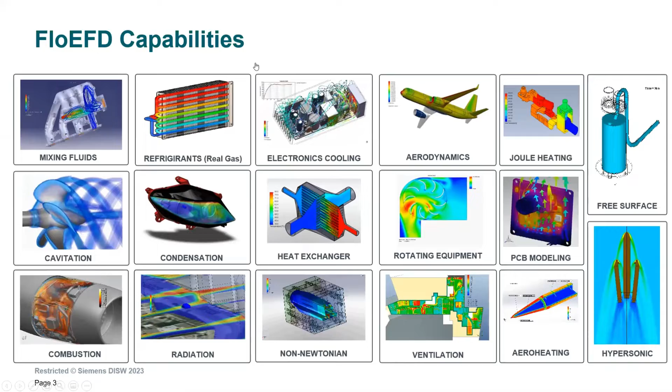Whenever you need to do board level analysis, chip level analysis, fans, heat pipes, guiding airflow—this is an area where we've had a lot of success and we've got a lot of functionality in FloEFD, and that's what I'm going to be talking about today.

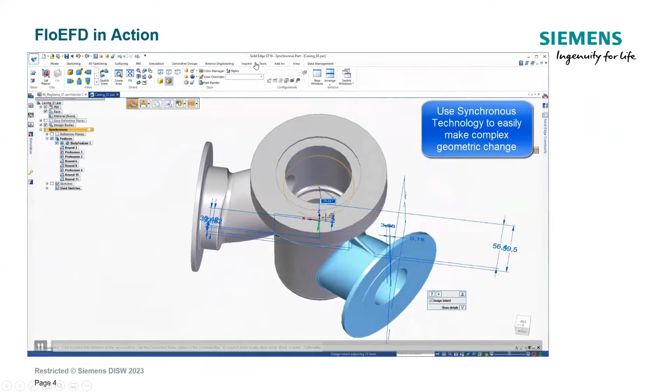So let's have a quick look at what FloEFD looks like in action. Here's a simple valve we can run a flow analysis on, looking at flow from inlet to outlet. The nice thing about being CAD embedded is you can make big changes to the geometry, like changing the angle of the outlet using synchronous modeling, and then just run the analysis again. To do that in a traditional tool, you'd have to go back to the CAD tool or the CAD department, have that change made, and rerun everything with a new step file.

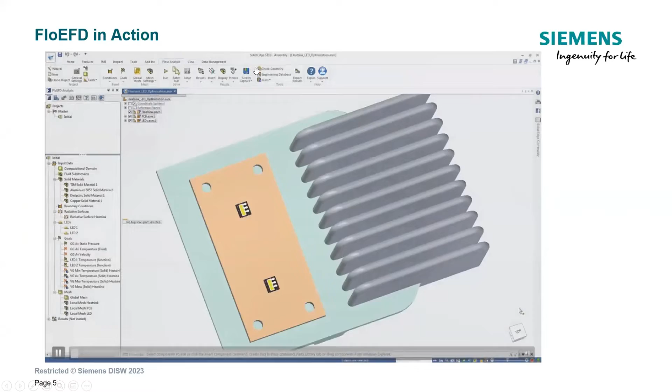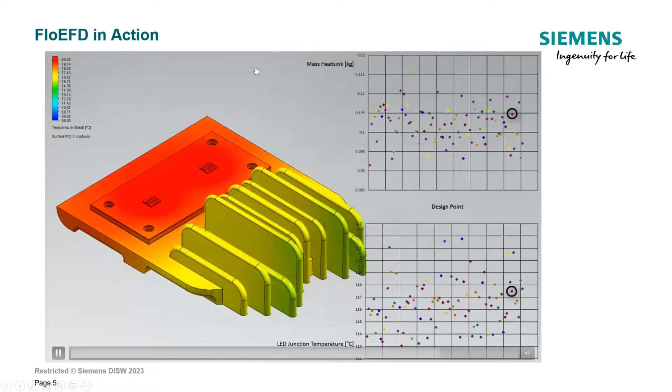Another example is looking at parametric variations. Here's an LED heatsink analysis. What if we had control of all the CAD parameters, so we could drive sketch dimensions and pattern dimensions, and really look for the most optimum combination of parameters—maybe a combination you hadn't even guessed—and let the software find the best one: the lowest temperature plus the lowest mass. We can really optimize on parameters which you can't do if you're just working with a step file or a Parasolid file. That's really the benefit of being CAD embedded.

Finally, FloEFD is part of the Simcenter 3D world, and it's accessible via value-based licensing or tokens. You buy a token pack from ATA and you have access to everything in the wheel. So let's say you start by buying tokens to access the structural analysis portion of Simcenter 3D, which is its core competency. That's great, but maybe six months down the line you have a request for additive manufacturing, motion, acoustic simulation, or thermal, which we're talking about today. You have access to everything in this wheel if you purchase tokens.

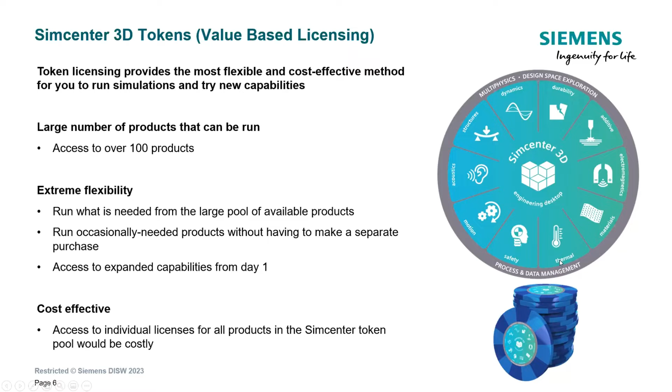It really future-proofs your investment and allows you to leverage all the capabilities of Simcenter 3D, which are getting added to with every major release. So watch this space. With that, I'm going to jump into a demonstration of FloEFD and show you what the software looks like, a bit of a look and feel of the tool.

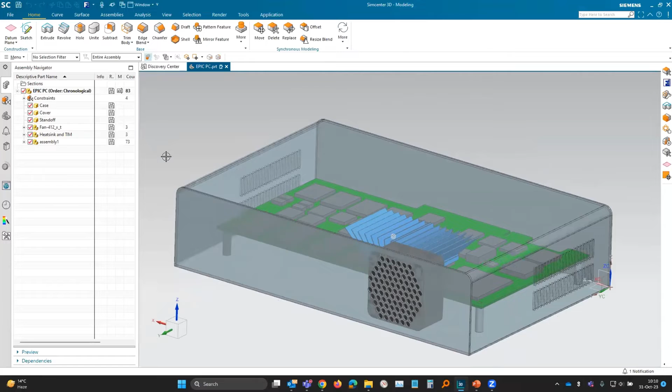So as you can see on my screen, I have an electronics box—this might be like a set-top box or a router or some other consumer electronics piece of equipment you might have in your house. You can see there's a folded sheet metal case and cover, and some electronics in there. If I hide these parts, we can see we have a fan driving airflow with an arrow showing the direction. We also have an extruded aluminum heatsink here, and a representation of the board with some blocks to represent the chips on this set-top box.

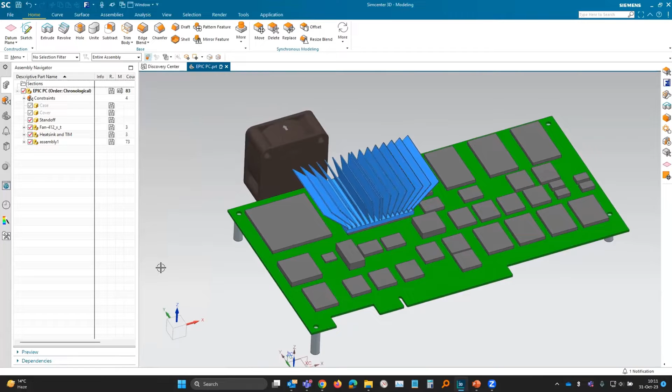We'd really like to understand what the maximum temperature of the electronics is going to be. Is my heatsink big enough? Is it too small? Do I need to adjust the fin parameters? Is my fan in the right location? Are my holes in the side of my casing sufficient, and are they in the right spot? You might just take a guess at some of these parameters based on tribal knowledge or past experience, but if you'd really like to understand if your combination of design parameters is fit for purpose, you need to do analysis. That's really where FloEFD comes in.

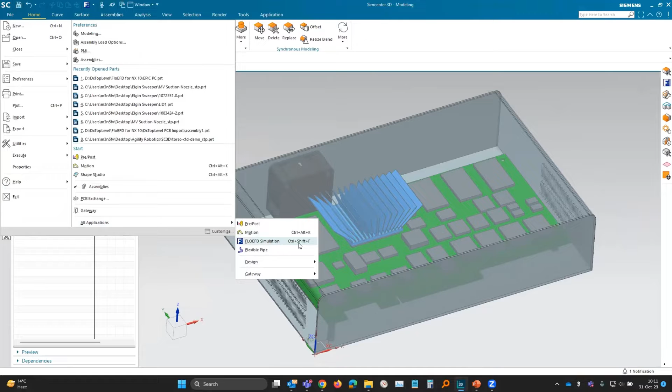So this is Simcenter 3D. We're currently in the modeling mode, so let's go into FlowEFD mode. Simcenter 3D has a variety of different modes based on what you're trying to perform, and FlowEFD simulation is one of the modes. If I switch into that, you'll see that at the top here, this changes to FlowEFD simulation.

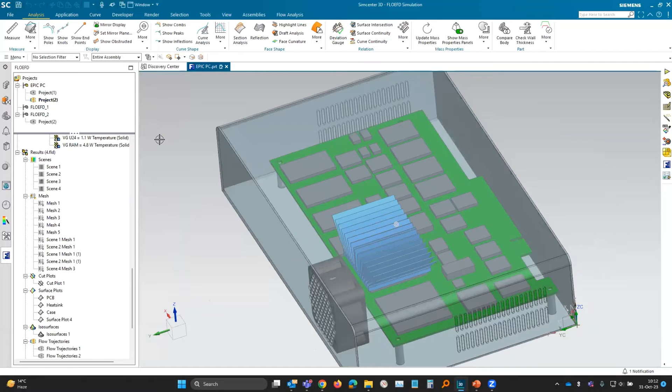Now, Simcenter 3D looks and feels very much like NX, and that's because it is a subset of NX—a stripped down version of NX which allows you to do CAD modeling, CAD manipulation, and importing of CAD data from competitive tools, and then it has all of the analysis capabilities bolted on top. So if you're an existing NX customer, this is a really great way to take advantage of the geometry you've built and perform analysis embedded within that NX environment.

So moving on to FlowEFD, you see that we have this flow analysis tab up here—it's one of the ribbon toolbar items, and it looks daunting.

There's a ton of buttons here, and we also have the FlowEFD tree combined with all the parts tree that we saw a second ago, where you can turn bits and parts on and off. You have all the constraints for your CAD assembly. If I was within a part, I would see all the part history here as well.

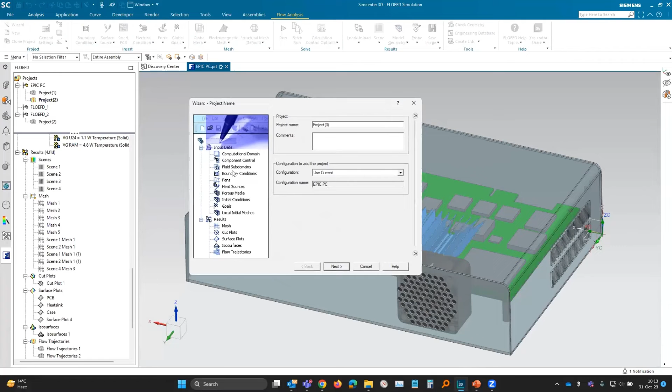But FlowEFD is also an extra icon here. What I'm going to do is just step through the wizard real quick and show you some of the features within this tool.

So you can choose a unit system. I'm going to be using an SI focused unit system, but I can also choose a US unit system as well to go to Imperial.

Now here, this is important. There are a few different analysis types we can switch on and off based on what we're looking to perform. Fluid flow and conduction, that's typically all we need to do. We also have a structural solver - if you need to do an FSI simulation, it can solve for static, frequency, buckling, and new non-linear capabilities in FlowEFD. We're actually taking the Nastran solver and porting it inside of FlowEFD for doing FSI. But I don't need that for now.

We also have EM - electromagnetic simulation, low frequency, so things like magnets, solenoids. We can have a look at electromagnetic fields and how that might affect things like traces on PCBs, or voltage or current that's induced in conductors due to magnetic fields. We can absolutely do that.

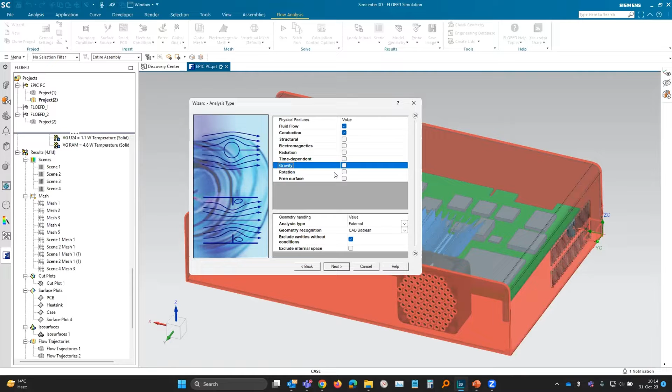Radiation, time dependent is your transients. Gravity, I'm actually going to turn that on. If there is natural convection, we need to set a gravitational direction denoted by this arrow. We also have rotation for pumps, fans, compressors, turbines. Free surface for when you have a gas and liquid interface, such as the surface of the sea - we can look at sloshing effects and droplet formation.

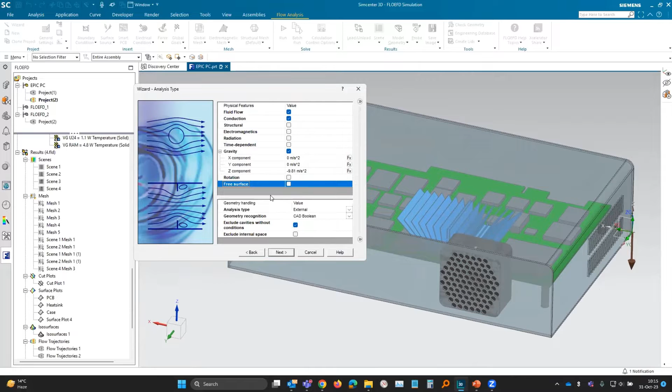So as you can see, there is a lot of capability in here, and quite a lot of overlap with our flagship CFD product, Star CCM Plus as well.

Moving on, I'm going to choose air as my working fluid - no, it's not under liquids, it's under gases. As you can see, we have a wide variety of fluids predefined in the database, even going as far as steam, so we can have a look at steam to water condensation. We can also look at phase change - we have phase change refrigerants in our library as well. And with air, we can actually look at humidity effects also.

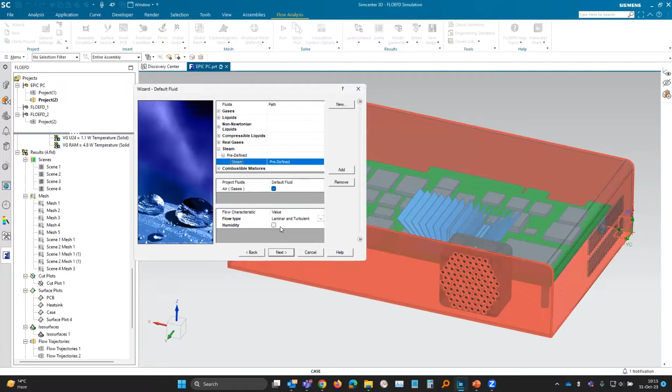Default solid - I'm just going to choose steel. Let's come down here to mild steel. Okay, so that's basically setting the standard material.

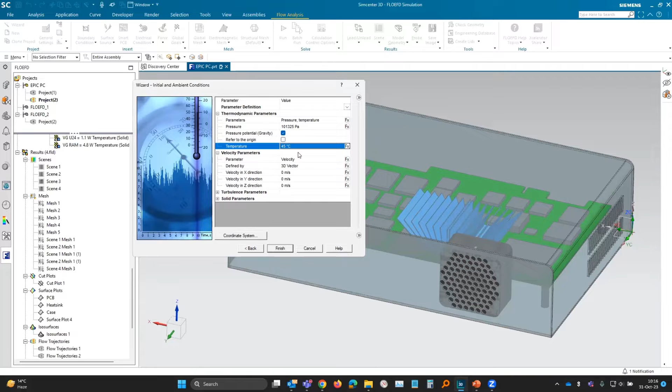I'm not going to worry about roughness. Here's my ambient conditions - let's say this set-top box is operating in the Arizona summer, let's say it's going to be 45 degrees C, or about 120 Fahrenheit. Worst case scenario. So I'm just going to click finish.

And what we're going to get around the geometry is a computational domain. You can see we're getting a volume around the electronics enclosure where our air is going to be modeled, where our heat transfer is going to be modeled.

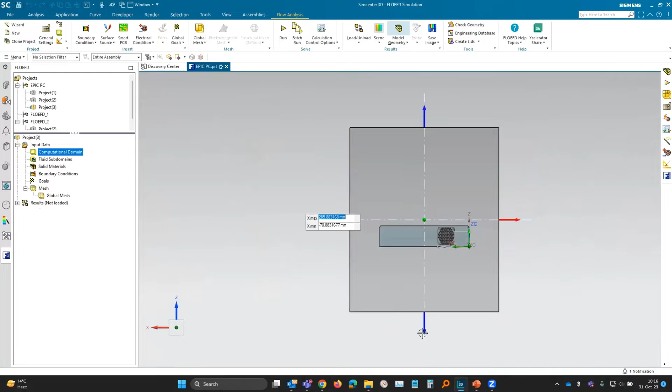It's a little bit big right now, so I'm just going to go normal to the screen, and I can just grab my edges of my domain and pull those in a little bit because I want to reduce the analysis scope. And again in this direction as well. Simple as that - I just click, and now we have our new computational domain specified around my electronics enclosure. No need to create a separate part to represent the air volume around my electronics, just resize the domain.

Now, as I mentioned, FloEFD has a lot of additional capabilities around electronics cooling. We have things like two resistor and network assembly models, thermal joints, thermal resistances, thermoelectric coolers, heat pipes, printed circuit boards, LEDs. We have electrical conditions, so voltage and current sources that we can define on conductors. We have electrical elements and IGBTs for high power electronics. We also have things like smart PCBs.

So these used to be modular, but now with the tokens in Simcenter 3D, you'll get everything that you can see on my screen as part of the token system in Simcenter 3D. Again, a great way to future-proof this particular tool.

One thing I did want to touch on is the EDA import capability of FloEFD. So at the moment, I do have an assembly representing my PCB, but if you want a little bit more detail, we can actually pull in a much more detailed representation of the PCB using the ODB++ ECAD file format.

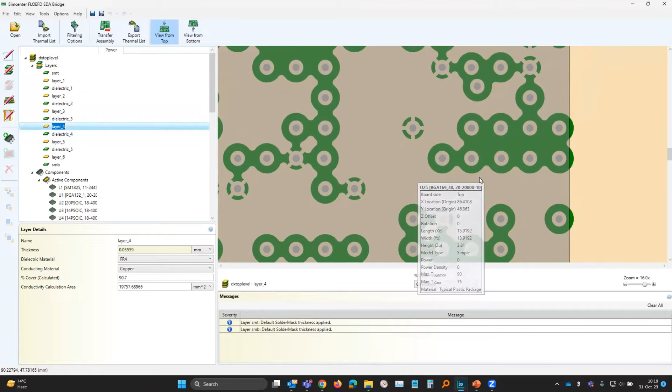And then the logic is performed on the chip, and then it will control something else on the board. So although these are primarily here for electrical connections, they're also very important thermal paths as well. You can control things like the diameter of these vias, the plating thickness of these vias. Some vias are also filled with solder to increase the thermal conductivity under high power components.

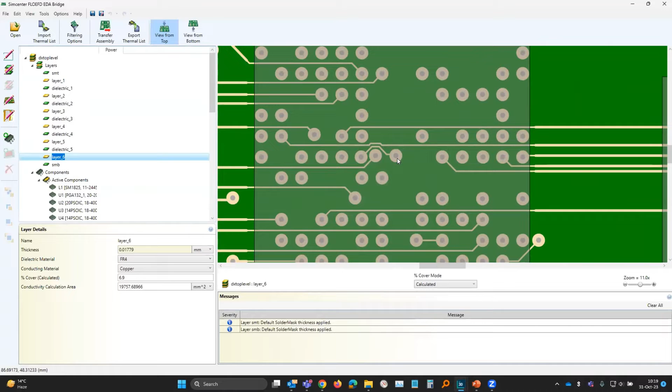So if you just use a block representation of the chips and the board, you're missing a lot of the crucial heat transfer paths that the ECAD team have so lovingly created. They created these thermal paths on purpose, and if we're not modeling that, we're doing them a disservice. So the EDA bridge allows us to pull that data through and use a smart PCB representation of the board.

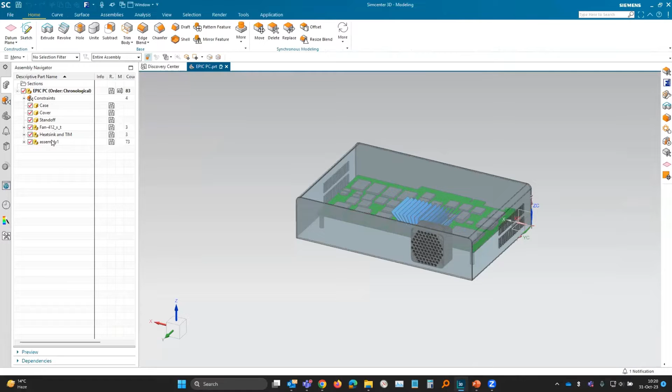I'm not going to actually click transfer because it takes two or three minutes, but I do have that already built over here, and I'd like to quickly show you what that looks like. Let me just go open in window. So I do have a sub-project defined here, and I do have this smart PCB.

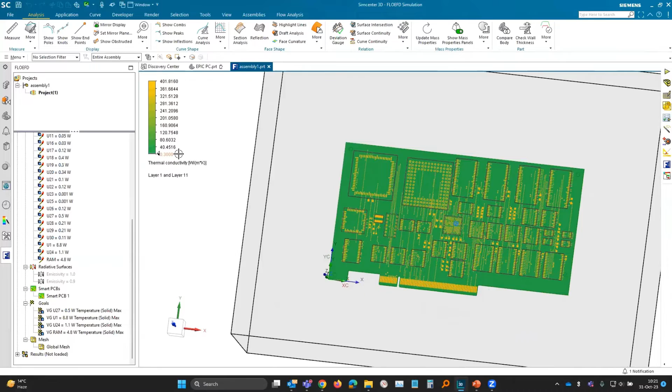As you can see, if we look at this legend, it ranges—I'm plotting by thermal conductivity, watts per meter Kelvin, between 0.3 and about 400. So 0.3 is your dielectric FR4, and then 400 is the copper. And this is really what the smart PCB is doing—it's pulling through that data.

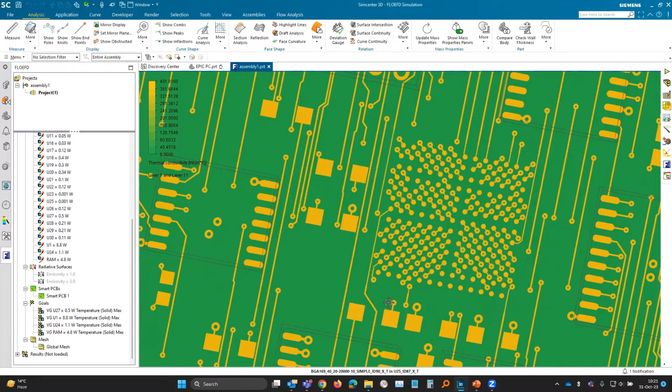Now if I zoom right in, it does get pixelated. All analysis has to discretize at some point, so there is some pixelation there. But at a high level, you can see the absolute amount of detail that's created in this smart PCB across all the layers and all the heat transfer paths through the board.

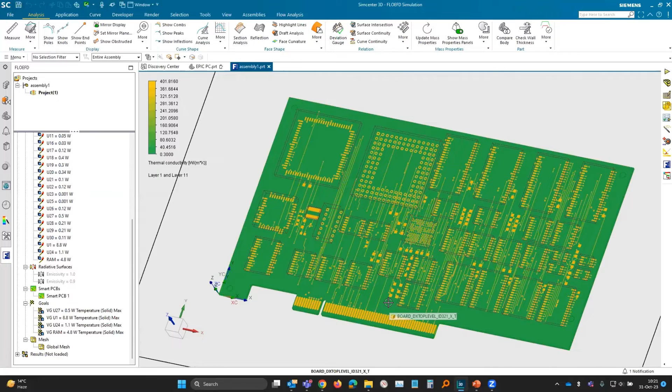Rather than modeling the copper explicitly, what FLOEFD is doing is creating a conductivity matrix based on pixels within the board. As you saw when I zoomed in, each one of these pixels has a conductivity to it, and it's linked to the neighboring node using a thermal resistance. So it's basically one big matrix of thermal resistances.

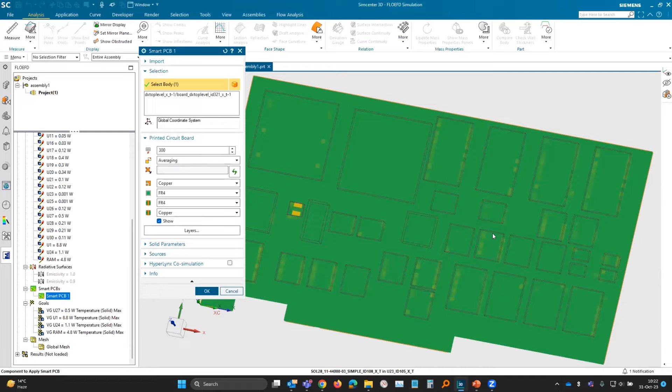Now this is a very, very detailed board. It is computationally expensive to model a board at this sort of fidelity. So rather than using the fine level of modeling, I can move to an averaging method, and what that does is it creates a pixelated representation of the actual geometry. It's just calculating this new pixelation now, but as you can see, we don't have as fine or as granular a density of pixels as we saw a moment ago.

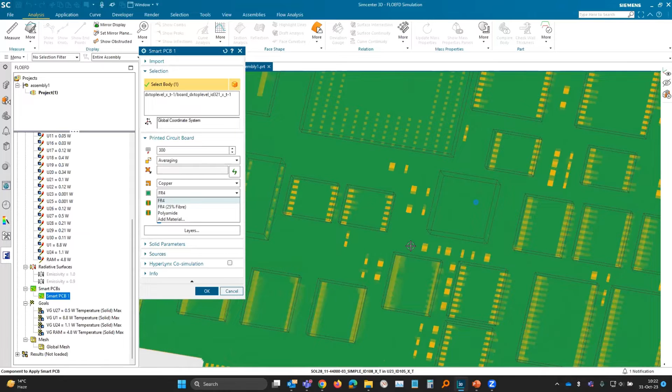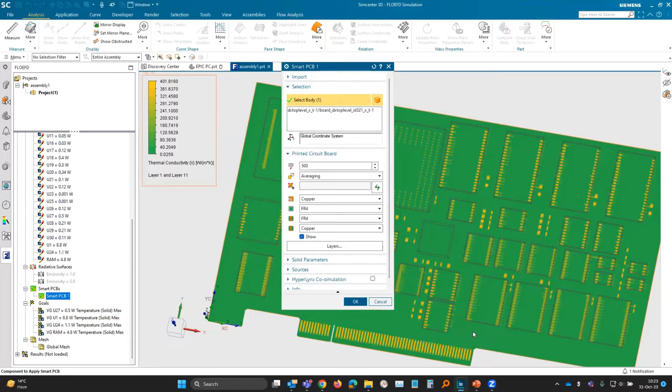Although it's not the absolute geometry for a thermal analysis and the conduction paths through the board, this is actually good enough, and you as the user can control the level of fidelity using this. You can see here, if I hover over it, number of tiles per layer's longest side. So if I make that a little bit higher, for example, and click off the box, it's going to calculate the new pixel density and show me what the new conduction paths look like based on that density.

Okay, so I'm not going to do this—I'm actually going to go back to my fine level modeling for now. It looks better for demo purposes, but I just wanted to show you that we have different levels of fidelity for modeling PCBs.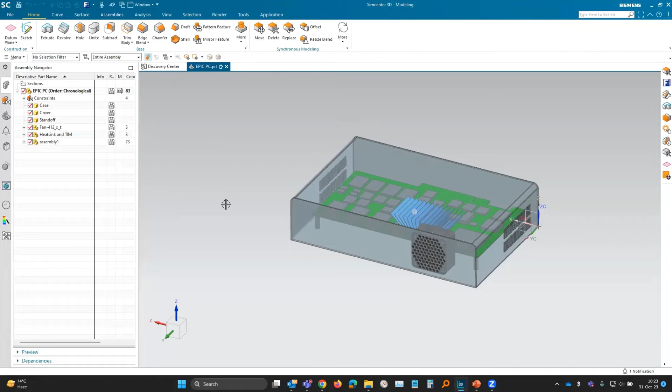Let's come back to the top level assembly and go back into FLOEFD mode, and go to my flow analysis. Other things we can do—so the PCB is taken care of, we have the board. I skipped over assigning powers onto the chips, but I'll show you that in just a moment. But other parameters—let's say we wanted to add a material to the heatsink.

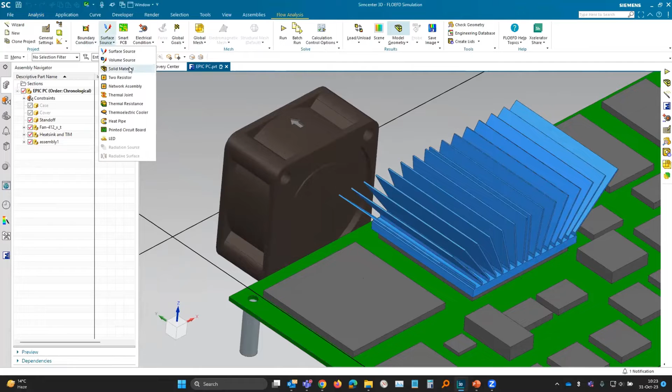I can just come to insert solid material. At the moment, remember everything's steel. I can click on my heatsink on the screen, predefined, alloys, aluminum 6061. Tick OK, simple as that.

Let's hide this guy. We also have a TIM under here, right? So if we do want to create a custom material, we can absolutely do that. Click on solid material, click the TIM, click the create edit button, and let's go to materials, solids, user defined. Let's just call this TIM, thermal interface material.

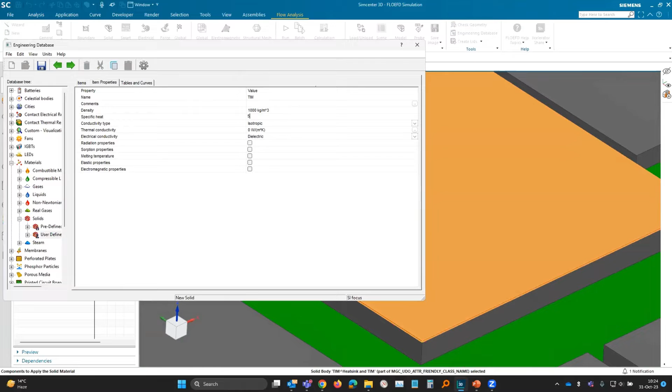I do need to give a density and a specific heat. You can grab from the datasheet, but the most important thing here is the thermal conductivity. Let's say this is going to be 2 watts per meter Kelvin for this thermal pad. I can save it, I can now select it, and now we have the thermal interface material assigned on that part.

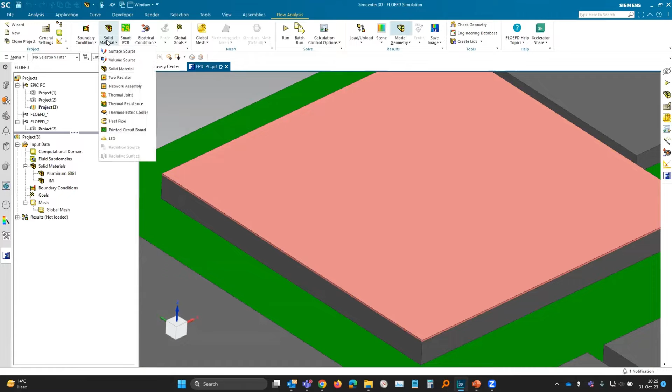Okay, if you wanted to, we could also assign a thermal resistance. Rather than modeling the TIM as a solid part, we could have a thermal resistance between the two parts. So I could give a material and then define just the thermal resistance, and that will define my thermal resistance between the TIM and the heatsink.

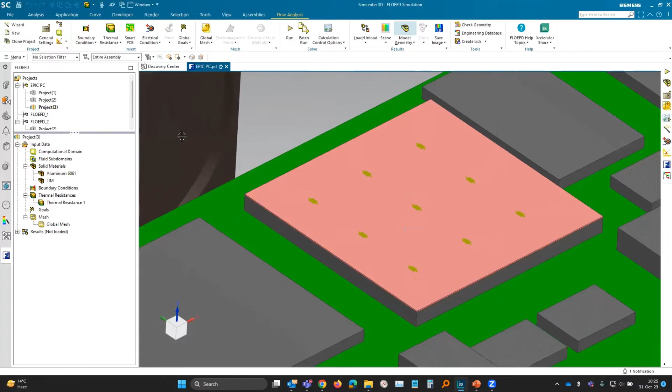Other things we can do, let's look at this fan. So if I come over to my, where are you? There it is, here's my fan. I can build into my fan. This is going to be an internal fan.

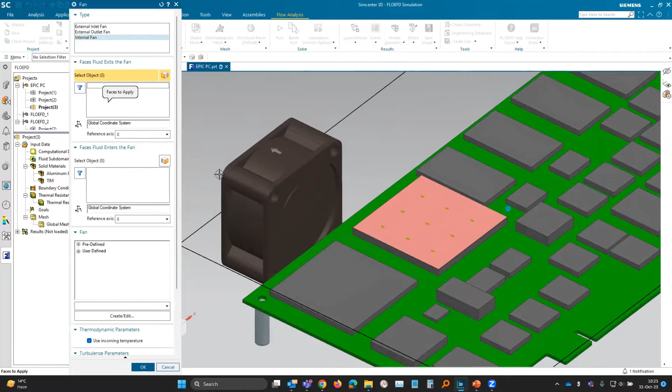So I need to select the face where the fluid exits the fan. So that's going to be this side over here. And you'll notice that I've removed the blades of the fan and I've got just a planar surface that I can click on, right? That's just a little bit of geometry preparation you need to do because spinning the blades, yes, it's possible, but it's also very computationally expensive.

So if we can take some shortcuts somewhere, we will. So I've just kind of removed the fan, removed the blades, and just put in a planar surface here where the flow will be sucked in from, and then ultimately blown out the other side. And then we need to link those two sides of the fan together with a fan curve, which we can just pick from some manufacturer datasheets that we have built into the software.

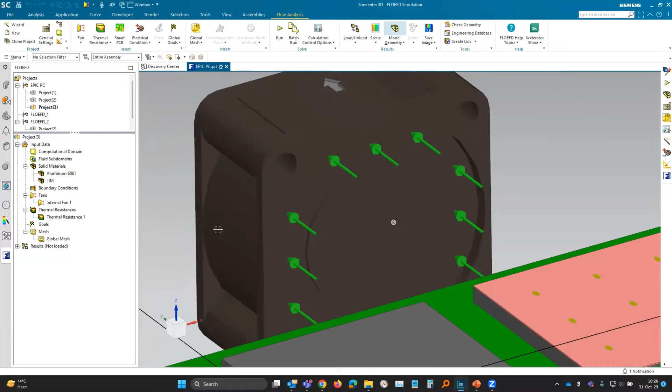Okay, and now you can see we have the fan blowing through the model like this. All right, let's just bring back my heatsink and my case and my cover.

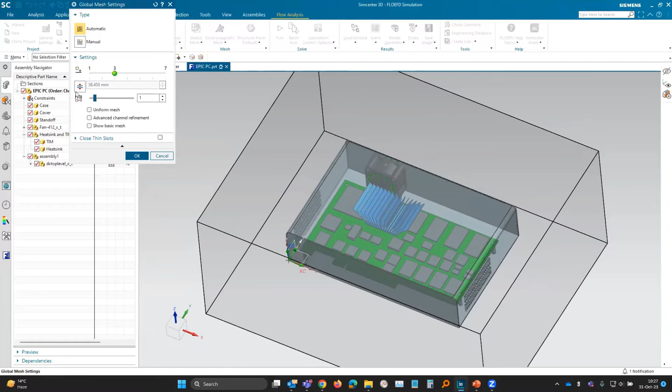Okay, so we're almost there. Let's say we've done all the pre-processing on this. We now need to define the computational mesh on my model. So moving from left to right in my toolbar, I can come over to my global mesh. We have two options, automatic or manual. So if I just click my basic mesh, it looks kind of coarse.

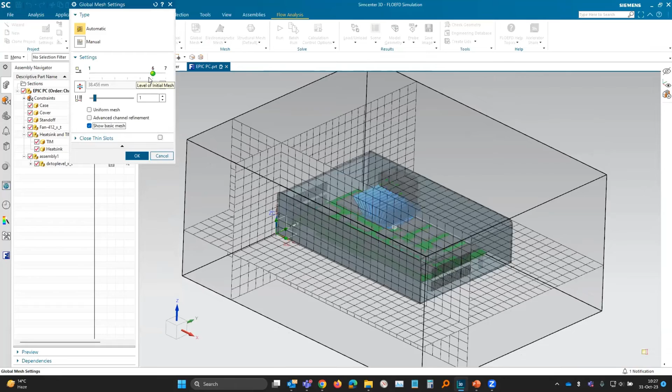Now, FLOEFD does use a Cartesian meshing schema, right? We don't have TET, hex, polyhedral cells, it's purely Cartesian in nature. Coming back to the way we democratize CFD for CAD designers, you don't want to be a meshing expert, you don't want to worry about boundary layer meshing. You just want to get an accurate result quickly without sending it to the CFD team. So with that in mind, we have just a Cartesian meshing schema, and it's what's called an immersed boundary mesh.

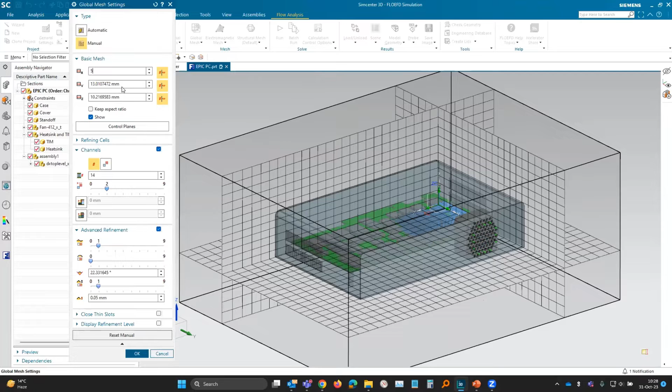I'll talk about that in just a second when we look at the results. But we can manually define things like the mesh size, the overall mesh size. If I want to make this finer in the X, Y, and Z direction, I can absolutely do that. So I can set my base mesh size. That's maybe a little bit too fine because we're going to be breaking the mesh down further from here.

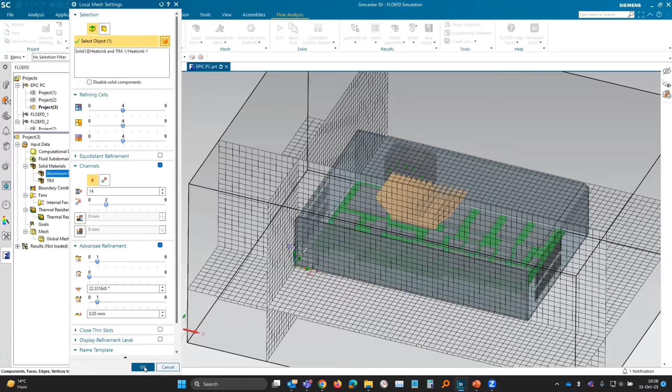And then we can do things like control the channels. There's some advanced refinement here, which is all part of the advanced training course. But we can also add in what's called a local mesh. So let's say you want more mesh on a specific part, let's say the heatsink, then we can add additional mesh by moving these sliders on specific parts inside the model, and that will ensure that critical parts have sufficient mesh resolution.

Okay, what I'd like to do is just kind of jump over to a model I've already solved and show you what the final mesh, the final generated mesh looks like. In fact, let me just take a slice through the model.

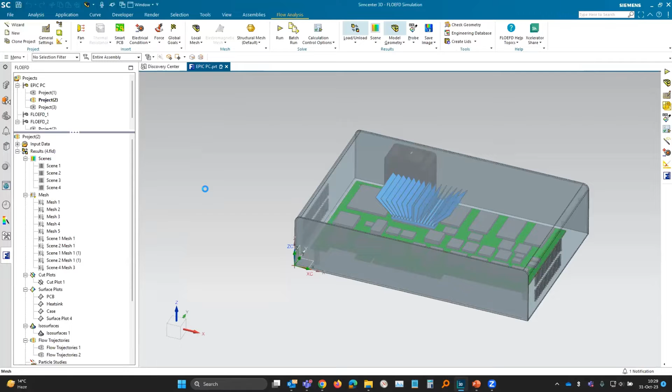In this way, let's just preview that, and I'm going to pull that through my heatsink like this. Okay, and let's hide all the geometry. So this is what the final mesh in FLOEFD looks like.

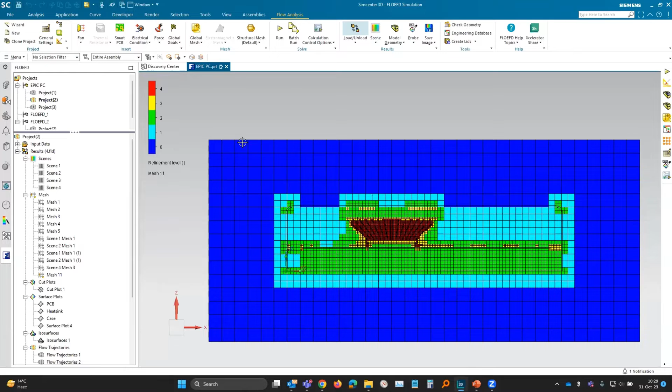So we've set the base mesh size, which is 10 millimeters, so 1 centimeter. These dark blue cells are 1 centimeter or 10 millimeter grid cells.

Now if I zoom into this corner here, the way we split cells and add refinement is what's called octree meshing. We take this cube and split it into 8 in 3D, or 4 in 2D. So now these cells are 5 by 5. We split into 8 again, and these are now 2.5 by 2.5, and so on.

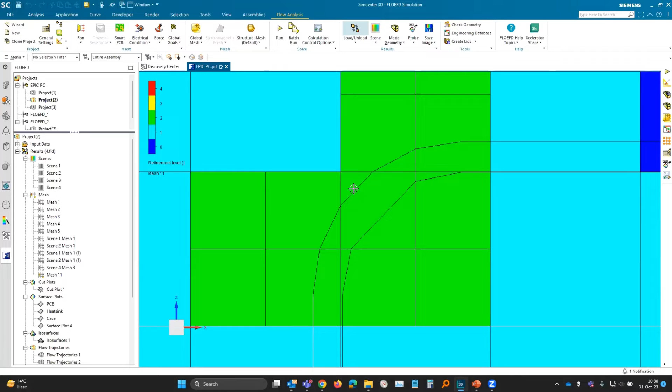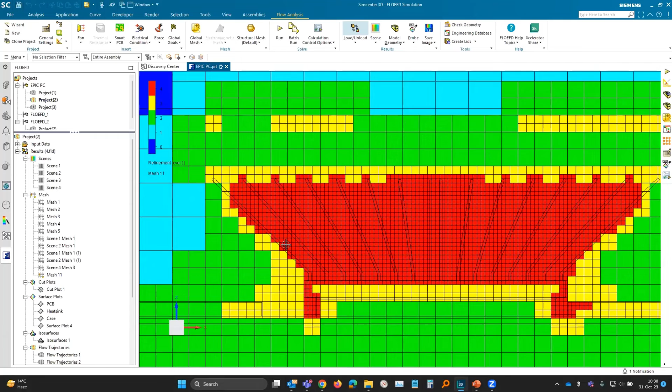You can see what was originally a nice smooth filleted curve we designed in NX has turned into a series of facets based on where the geometry crosses the boundary of the mesh, as you can see here — a series of flats. So if you need better resolution, it's just a case of forcing the software to split the cells further, which you have full control over.

All right, so around my heatsink I've got much finer grid cells, 3 to 4 grid cells between the fins. Another interesting thing is how we can have fluid, solid, and fluid regions within a single cell. You're not restricted to just solid and fluid cells — you can actually have multiple control volumes within a single grid cell.

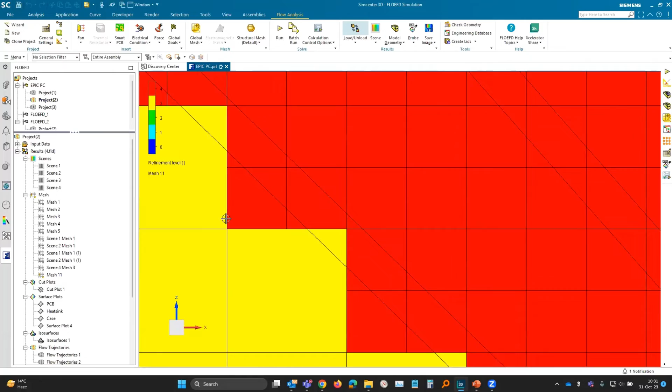And this is part of the secret sauce in FLOEFD. It's called the immersed boundary method, where we apply a wall function, the boundary layer wall function, on this planar surface between the fluid and the solid. I don't want to get into that too much, but I just wanted to highlight that this is a very different approach to CFD than most other tools take.

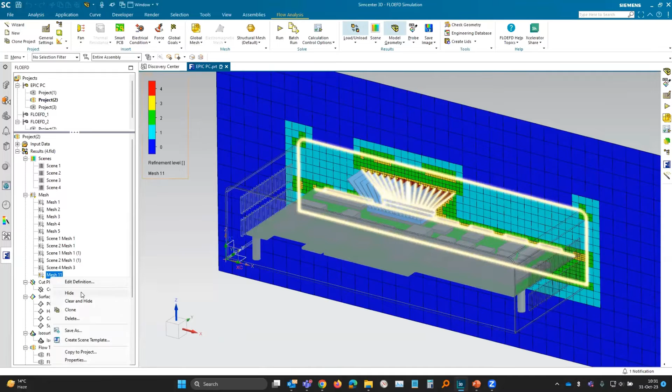And really the benefit is you don't have to be a meshing expert. You don't have to worry about boundary layer meshing — the software takes care of it for you, so you can get on with the business of actually designing your products. Okay, just a quick word on solving before we move on to results.

You do have to run the mesher. It is a finite volume mesher, and it is multi-core by default. My laptop's only got 12 cores, so I can select 12 cores. If you have a Threadripper machine with 128 cores, you can use 128 cores. We don't limit you by solver packs or anything like that — if you have FLOEFD, you have full core solving capabilities.

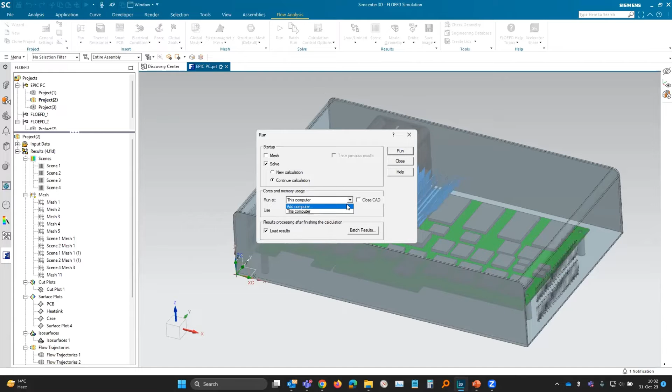You also have the ability to send jobs to a computer on the network. You're not limited to just a node-locked solve — we absolutely support floating solves and standalone solves, so it frees up your local machine for day-to-day work. And that's all with the standard tokens, completely accessible. This particular model took approximately 1 hour to solve, something along those lines.

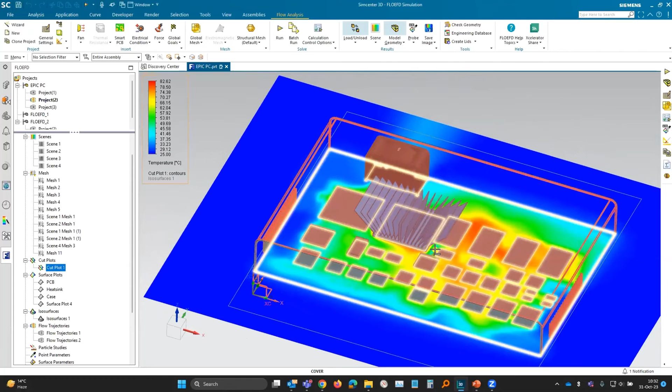And then we can start to have a look at some of the results. So I'm just taking a 2D slice through the model here, looking at temperature. As I move this slice through the model, I can probe the temperatures. My ambient is 25, not 45 as I said, but we can move my mouse around and see what sort of temperatures the airflow is getting to — the air temperatures within the box.

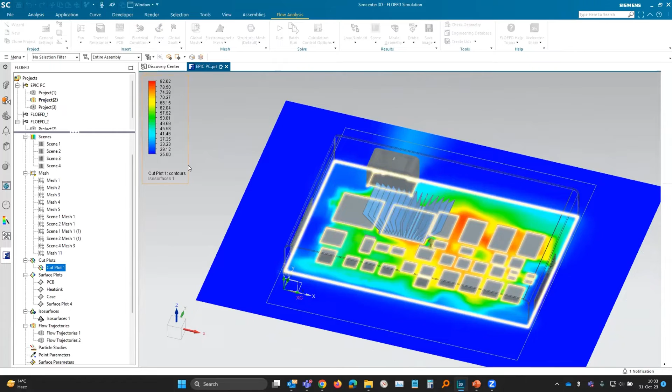If I don't want just temperature, I can switch over to velocity. So I can see the outlet of my fan, and some jets being formed at about 2 meters per second. Let me just pull this down, pull this up a little bit — I can see some jets being formed between the vent holes, as you can see here.

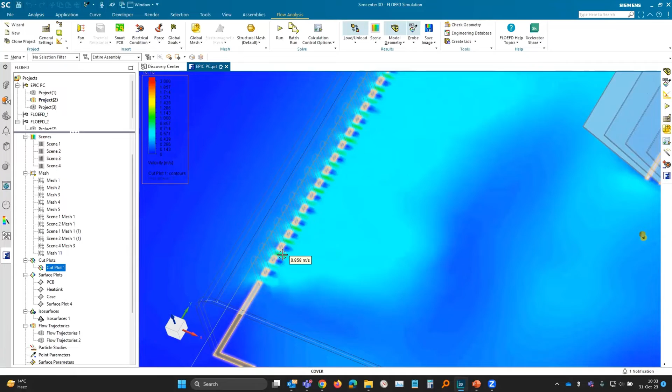So I can kind of interrogate the model using these cross sections, looking at a variety of different parameters. Velocity and temperature are probably the most interesting in this case, but we could also look at pressure real quick. So there is a very slight pressure difference from the inside to the outside of the box, because this fan is pulling a vacuum, and there's a resistance as the airflow crosses those vent holes.

One thing you do need to be a little bit careful about is if you have a lower pressure inside your electronics box, that's going to be sucking in a ton of dust. This could get very dusty without filtering. So we might want to flip that fan around and actually blow air into this model and pressurize it.

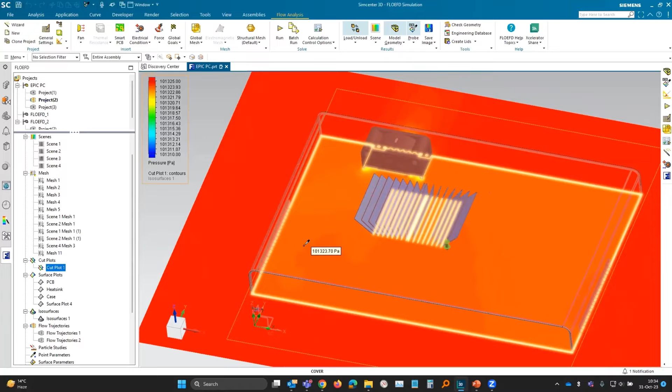So again, things we can look at in the analysis stage before we've committed to tooling.

Let me just jump back to temperature. So you can see we can take these cut plots, moving them up and down through the model. It's not too exciting.

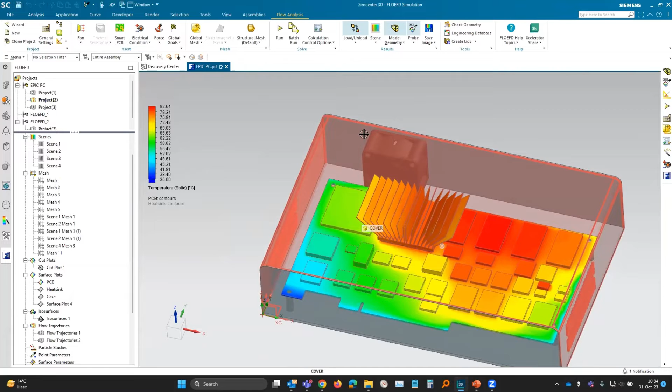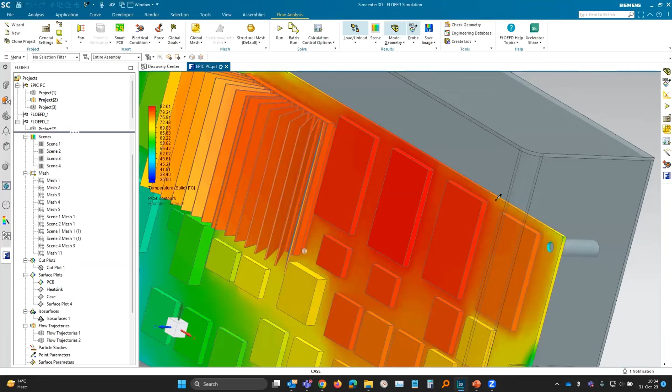We can also visualize on the screen the actual PCB temperatures, the heatsink temperatures, the hotspot temperatures. If I just zoom in underneath here, you can see there's this hotspot under my CPU. The rear side of my board is getting up to about 80 degrees C. Other areas are even hotter, 81, right? So there's actually some RAM modules that are hotter than the actual CPU because they don't have any thermal design on these parts.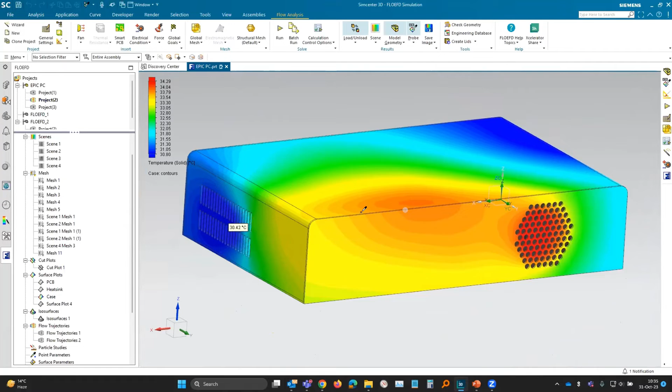So we can have a look at temperatures, both on the PCB and, let's say we wanted to have a look on the case as well. If this is a set-top unit, we don't want kids touching this unit and burning their fingers. So 33 degrees, that's more than acceptable, 34. Anything below 40 is about acceptable for consumer goods. But yeah, we just want to make sure that our case temperatures are low enough.

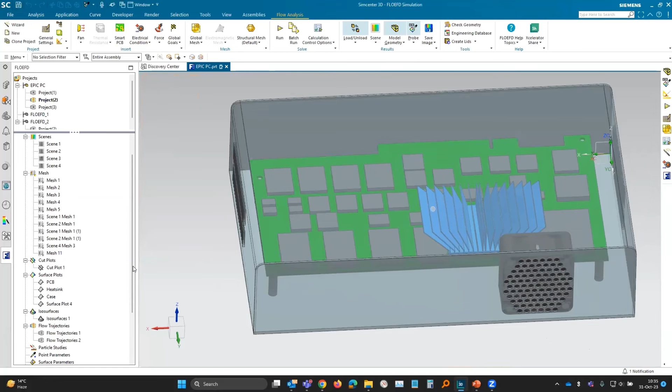So let's just hide that. And then we can also have a look at what the flow looks like through the model as well.

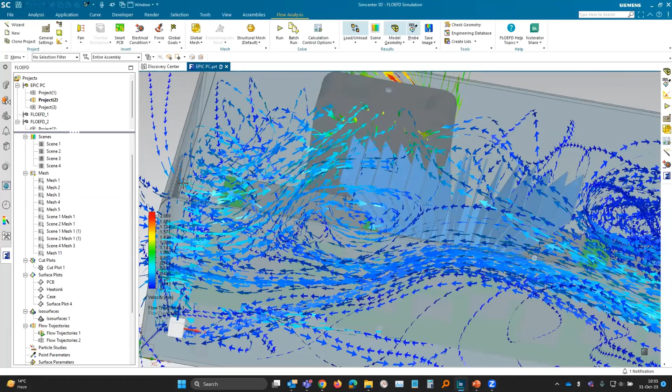All right, so you can see if I just animate this real quick, you can see flow being pulled in from the left-hand side, from the right-hand side. A lot of the flow actually bypasses the heatsink, it doesn't actually go through the heatsink. Air is always going to take the path of least resistance, so it's recirculating over here. This is potentially where dust could fall out of the flow due to the low velocities that it's encountering and the swirling flow.

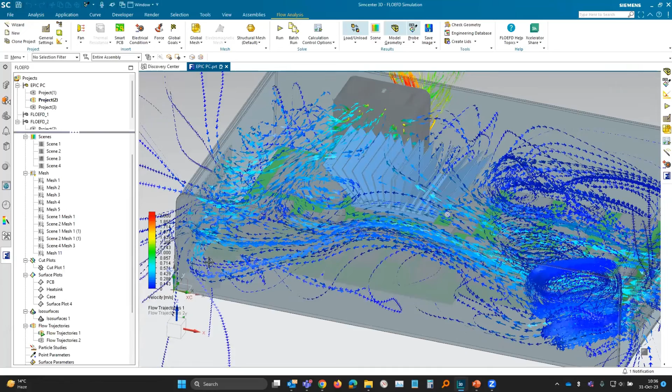The air is currently colored by velocity, but let me just change that to fluid temperature, for example. Oh, no, I need to change the range here. Right, so you can see where the hot air in the box that's struggling to get pulled out by the fan, it's kind of recirculating and creating that hot spot on the case.

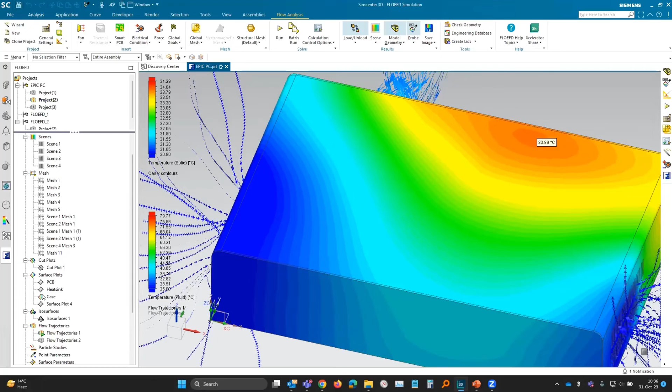So we saw a bit of a hot spot over here. That's because hot air isn't able to leave the case, it's just transferring its heat to the actual casing. So we can kind of find root causes of some of the problems associated with the electronics, hot spots, dead zones within the airflow, things like that.

All right, so we can generate nice, pretty pictures. We can also extract engineering information from this analysis as well by having a look at the actual steady state temperatures of my critical components.

So here's my CPU temperature, which is my U1 component, 79.8. Temperature of my U24, which is this component here, 64.8. My maximum RAM temperature, 82.57. My flow rate through the fan in CFM, 2.38. So we can get quantitative results from the CFD analysis.

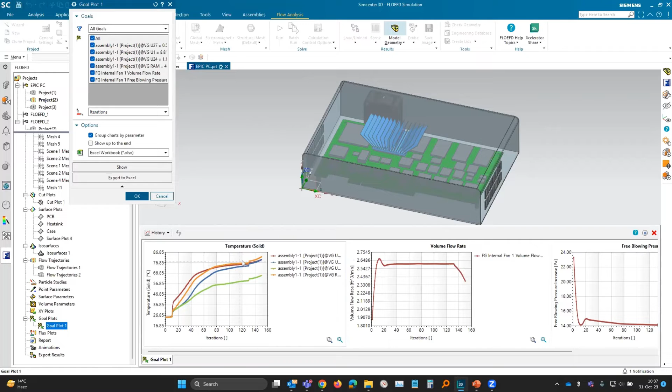Including the convergence history. Ooh, doesn't look good. I should have let this run a little bit longer. I was going to say everything should be nice and plateaued. I think I was playing around with the model yesterday before this, but ignore this end bit. Everything is nice and plateaued, and that's what we're looking for in an analysis.

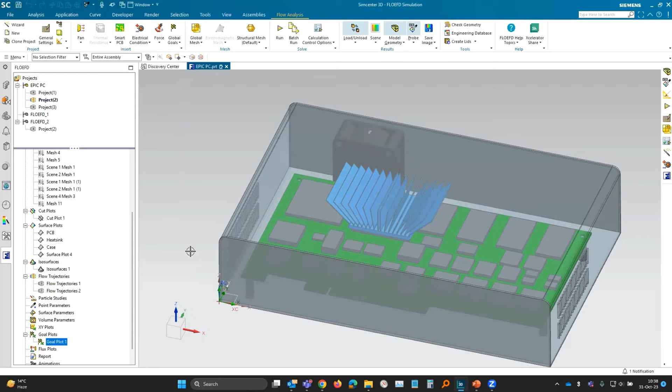All right, so we've got to this stage now. Most tools can show these pretty pictures, get the temperatures, look at the flow. So what? The real benefit of being CAD embedded is being able to make changes to the model quickly and then understand the delta between projects. Because this is Simcenter 3D, which is an NX embedded tool and has a lot of the NX CAD functionality, we can make changes.

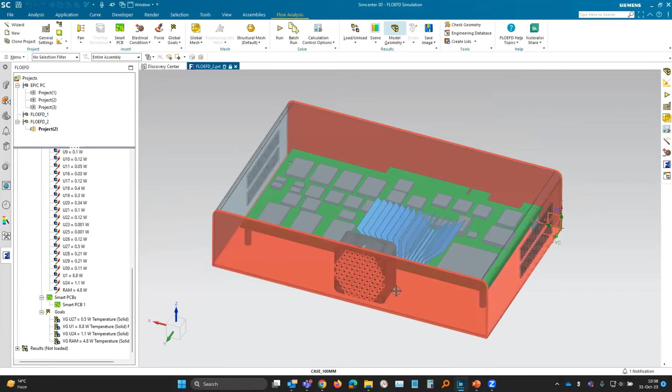Like, for example, what happens if we move the fan? That's just a constraint change. So I think I'd constrain this fan from this edge over here. What if we make it 4 inches rather than 2 inches? So we just move that fan over a little bit, and then we can load in the results. That's annoying, I thought I solved this. We can load in the results, look at the temperature differences, and compare.

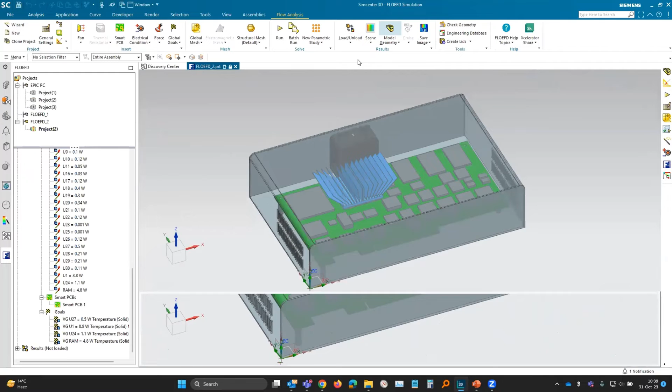We can also drive optimization. So we have something called a parametric study, which allows me to select input variables. It can actually look at NX constraints, dimensions, sketches, and use those to drive variance. Yeah, let me just select a... not this parameter.

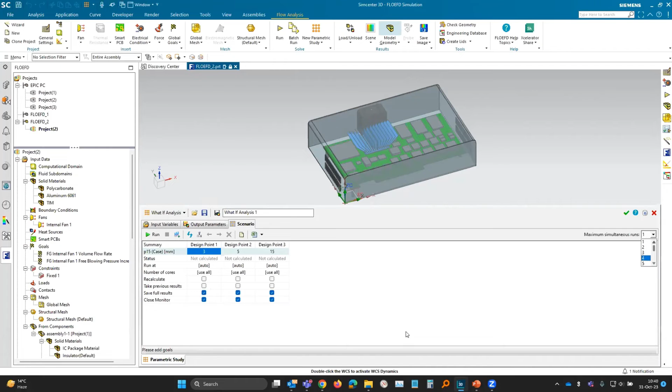All right, let's go to the case. I believe it's P15. So this is a dimension, and I can drive a slightly different dimension, let's say 5mm, or let's say 15mm. The software will create a series of scenarios where we vary that CAD dimension and run them all sequentially. If you have multiple solvers, you can run more than one at the same time. Being able to do these CAD variants is a big benefit to being CAD embedded and keeping that CAD workflow aligned with your simulation workflow. That's really what we're trying to do with this product: not go to an external tool, not have to be an expert in it, just run it straight in your CAD and get decent results very quickly.

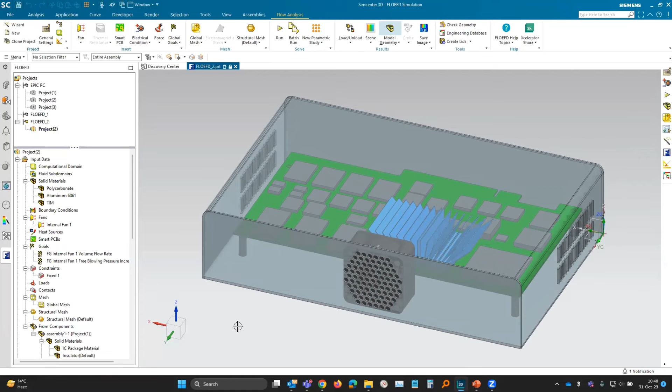So with that, I know I covered a lot of capabilities very quickly, but Scott, do we have any Q&A around this particular product? Yes, we do.